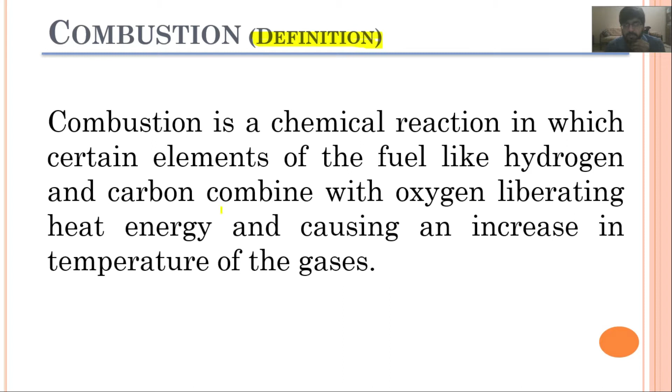Then we discussed the combustion reactions and their equations, how these equations are formed. As I explained earlier, if I have a fuel like methane and I combust it in the presence of air, as a result I will get a molecule of carbon dioxide and two molecules of water vapors, and in order to balance the chemical equation I will add 2 in the oxygen as well.

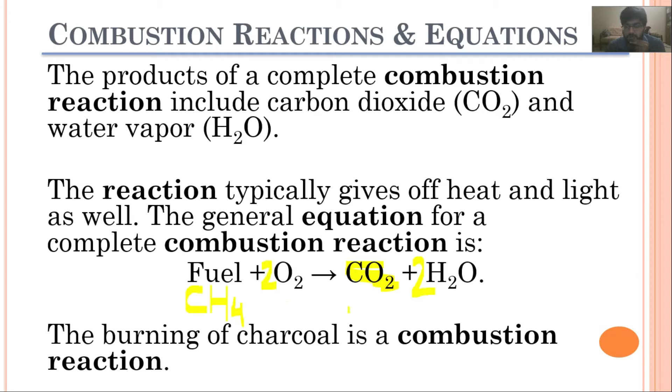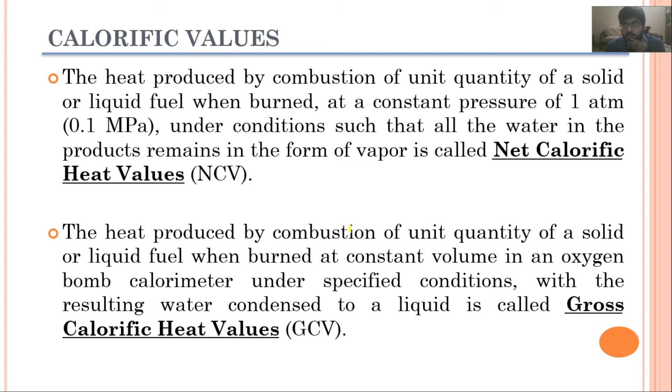Then we discussed the calorific values of a fuel, and I explained the difference between the net calorific value and the gross calorific value. Then we started

the topic of homogeneous mixtures, and I explained that homogeneous mixtures are desirable for SI engines, and the carburetor is the equipment which performs this process of preparing a homogeneous mixture for combustion.

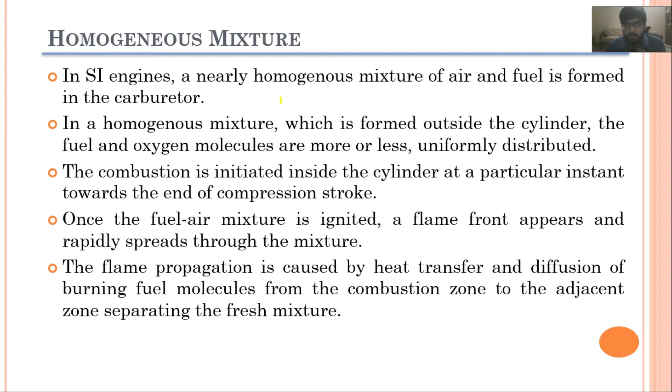Then we also discussed the factor of normal flame velocity, and that for the equivalence ratio of 1.1 to 1.2 we will get the maximum flame velocities. Then

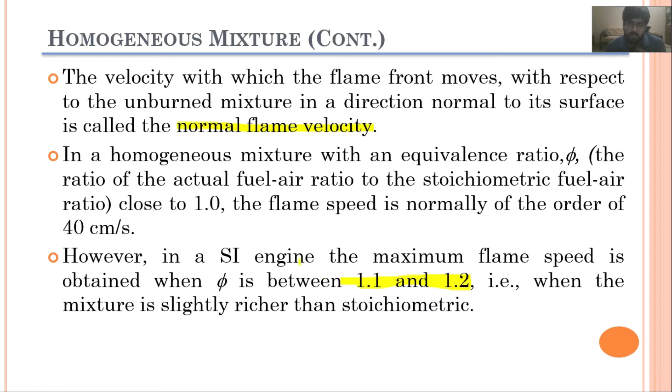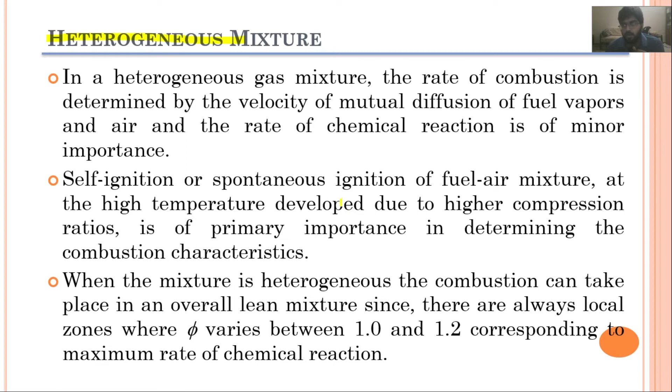we moved forward towards the topic of heterogeneous mixtures, and I explained that in CI engines we basically have a heterogeneous mixture because the fuel is being injected after the compression stroke. Because of the high temperature of this hot air, the fuel basically self-ignites after gaining energy from the hot molecules of the air.

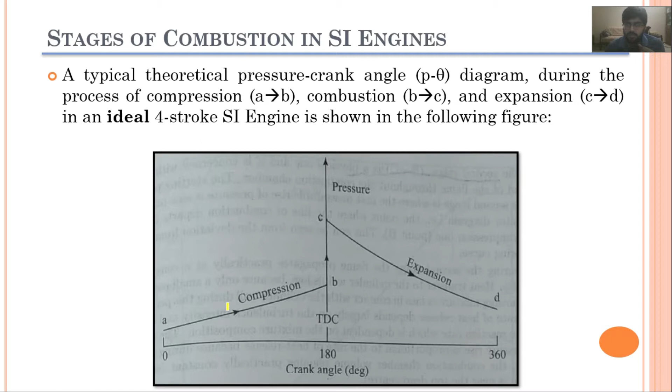Then we discussed the stages of combustion, and I explained that in SI engines we have basically three stages of combustion. First one is the ignition lag, second is the propagation of flame, and third one is the afterburning.

In this ignition lag, at the beginning of this first period, the spark ignites, which will combust the fuel present in the quiescent layer, and then these already burned particles of flue gas will move forward, and it will compress the air-fuel mixture present beyond them, and transfer the energy to them, and then they will combust.

So ignition lag is that duration from where the combustion has started, and we do not have that much significant rise in the pressure.

The second period starts when a sudden increment in the pressure occurs, and this second period is basically known as the propagation of flame. In this phase, the flame speed reaches its maximum velocity, and the entire air-fuel mixture in the combustion chamber will start to combust.

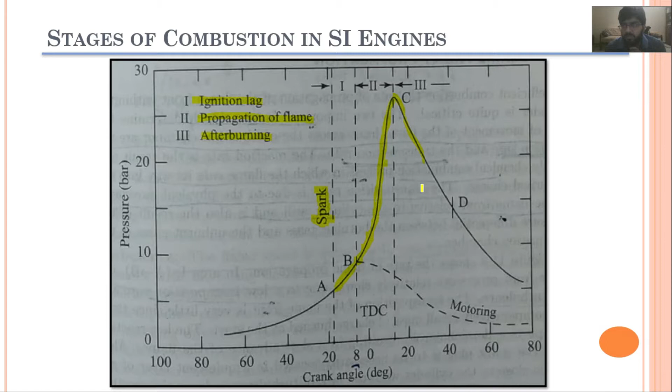After that, in the third phase of afterburning, most of the fuel particles have already been combusted. It is basically the power stroke, the exhaust stroke is after it. Now the piston is moving downward, the pressure will start to decrease, and if there are any fuel particles which have still not combusted yet, they will also combust in this phase.

Then we discussed the flame front propagation, and I explained that it depends upon two factors: the first one is the reaction rate, and the second one is the transportation rate.

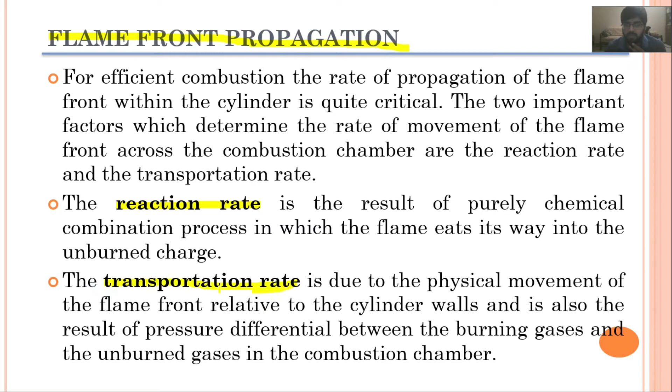Then I also explained this graph, that in the first region we have a low transportation rate, and similarly we have a low reaction rate in this region as well. Due to this low reaction rate, the advancement of the flame front is quite slow.

From B to C we have a rapid increment, a rapid propagation of the flame, because we have higher turbulence in this region, present because the flame has now gone beyond the quiescent layer, and in this region the reaction rate is quite high.

Similarly, in this region from C to D, the reaction rate is again quite low because we have only a few particles of the fuel left, and whenever it gets the oxygen to combust, it will combust.

So the reaction rates from C to D is also quite low.

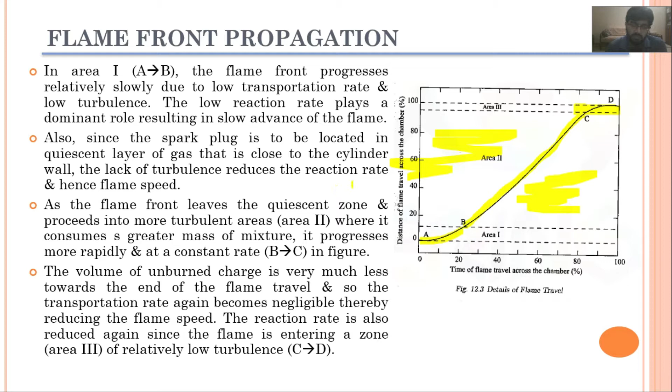Then we discuss the factors which basically influence the flame speed. I explained that with the increase in turbulency, the flame speed will also increase, and it will reduce the tendency towards knocking as well.

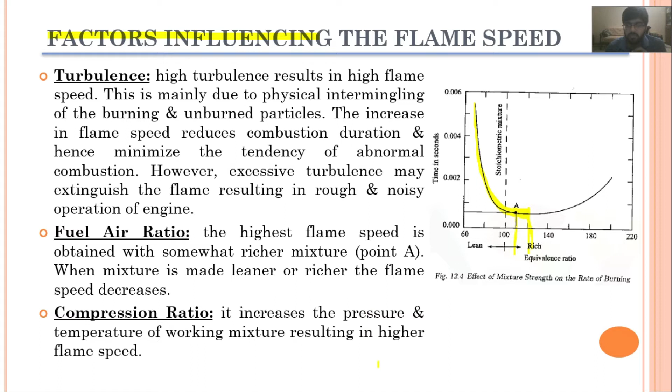Then I explained the second factor, the fuel-air ratio, with the graph showing that maximum flame speeds occur when the equivalence ratio is from 1.1 to 1.2. The third factor is the compression ratio. By increasing the compression ratio, pressure and temperature of the working mixture increases, which results in a higher flame speed.

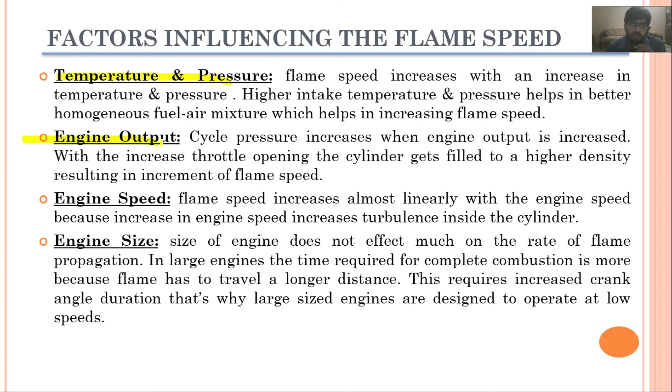The next factor was temperature and pressure. When we increase it, higher flame speeds are achieved. Then we discussed another factor: engine output, engine speed, and engine size.

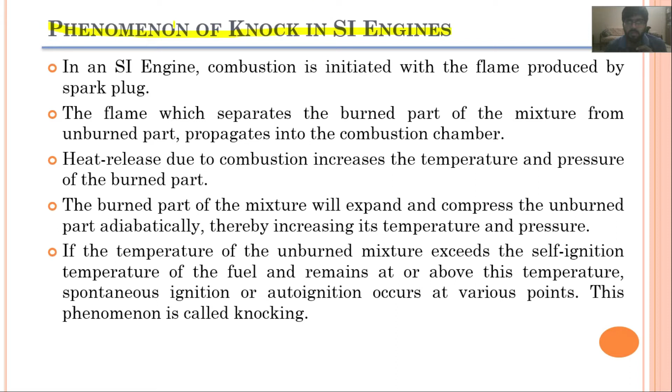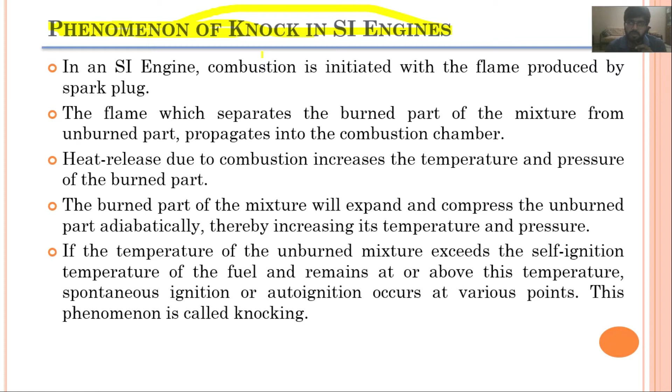Next, we discussed the phenomena of knocking in SI engines. I explained that in an SI engine, knocking basically occurs at the end of the combustion process, because if we divide the air-fuel mixture present inside the combustion chamber into layers, for example, this is the layer where combustion has started.

It will compress the next layer, and because of this compression, the temperature and pressure of the next layer rises. If that temperature increases beyond the self-ignition temperature, knocking will appear.

A secondary flame will be produced, which will propagate against the direction of the main flame, and because of this, knocking will be produced. So this is the phenomena of knocking in SI engines, and it usually occurs at the end of the combustion stroke.

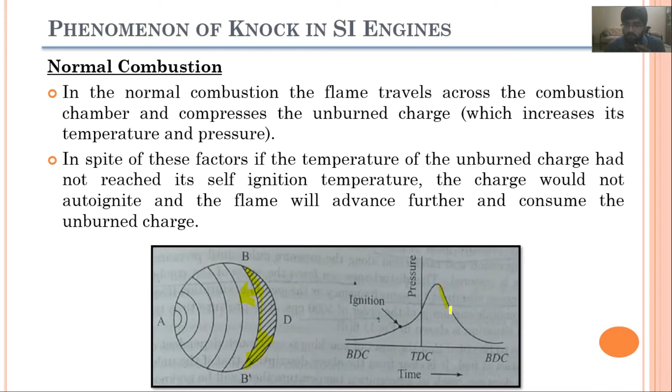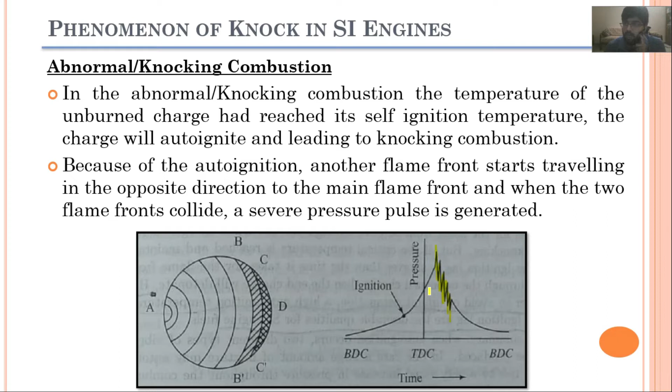So now today I am going to start off with the factors which basically affect the knocking. I didn't cover this topic in the last video because of the time duration limit, and the video duration had already gone beyond 75 minutes. So today I am going to start this topic.

The first factors are the density factors. So the first one is compression ratio. As I explained earlier, when you increase the compression ratio, what we are doing is basically increasing the operating pressure and temperature of the working fluid.

So when we increase the temperature and pressure, it will decrease the ignition lag, and when the ignition lag has been decreased in an SI engine, it will result in a greater tendency towards knocking. So we can conclude that if the compression ratio increases, the tendency towards knocking has also been increased.

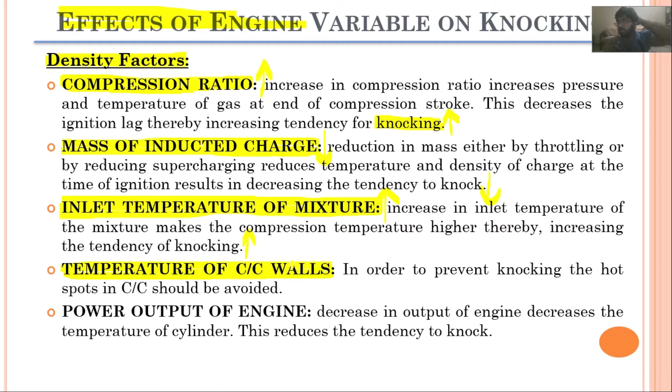Okay, the next factor is again temperature, but this time of the combustion chamber walls. If we have hot spots in the combustion chamber, or if the temperature of the combustion chamber is quite high, it will reduce the ignition lag duration and increase the probability of knocking as well.

So if we increase the inlet temperature, if we increase the temperature of the combustion chamber walls, knocking will also be increased.

So again, it has a direct relation as well. Next is the power output. As explained earlier, the power output of an engine is controlled by the pressure at which your engine is operating. So if we are reducing the power, it means the operating pressures of the engine have been reduced. Since the operating pressures are reduced, the operating temperatures will also be reduced, and it will result in a reduction in the tendency towards knocking. Your engine will have a lesser tendency towards knocking.

So we can conclude the density factors by saying that all the density factors like compression ratio, mass of inducted charge, inlet temperature of the mixture, temperature of combustion chamber walls, and power output of engine, they all have a direct relation with the knocking. If we increase these parameters, it will have a greater tendency to knock. If we reduce these parameters, it will have a lesser tendency to knock.

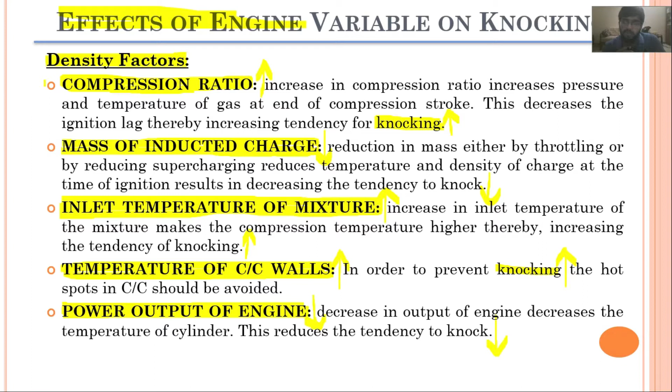Now moving forward, the next factor is the time factor. Starting off with the factor of turbulence, as explained earlier, when we increase the turbulence, the flame speeds are increased, and when the flame speeds are increased, the flame will travel throughout the combustion chamber very quickly, and as a result it will reduce the tendency towards knocking. So when we increase the turbulence in the combustion chamber, knocking will be reduced. So here we did not have a direct relation, we have an inverse relation.

So by increasing the turbulence, the knocking will be decreased. But we have to keep in mind that higher turbulence can also result in extinguishing the flame. So combustion chambers are usually designed keeping that in mind, that it should not extinguish the flame. The turbulence should be just enough that it only increases the flame speed and does not extinguish the flame.

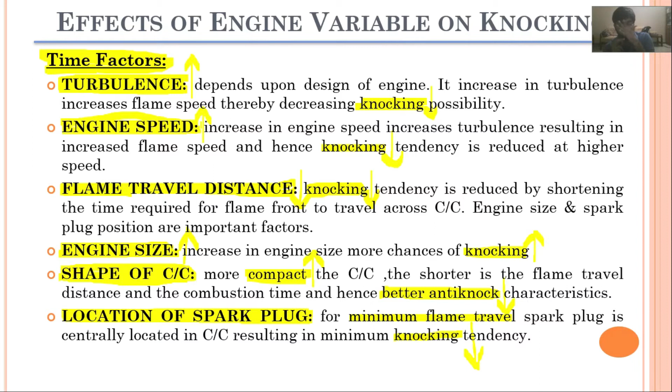Similarly, when talking about the shape of the combustion chamber, the more compact the combustion chamber, the better its anti-knocking characteristic. And if the spark plug is placed in a position where we do not have a minimum flame travel distance, we will have a greater tendency towards knocking, because the flame has to travel a larger distance, which can result in knocking.

Next factor is the composition factor, which is basically the fuel air ratio. As explained earlier, maximum flame speeds occur when the equivalence ratio is from 1.1 to 1.2. So maximum flame speed and flame temperature occur at an equivalence ratio of 1.1 to 1.2.

When this equivalence ratio is 1.1 to 1.2, we not only have higher flame temperature, but also a higher reaction rate. This means the flame will travel throughout the distance very quickly, since the reaction rates are quite high.

Here you can see the knock limited compression ratio versus relative fuel air ratio, which is the equivalence ratio curve for isooctane. For an equivalence ratio of about 1 to 1.2, you can see that for isooctane the compression ratio is about 7.

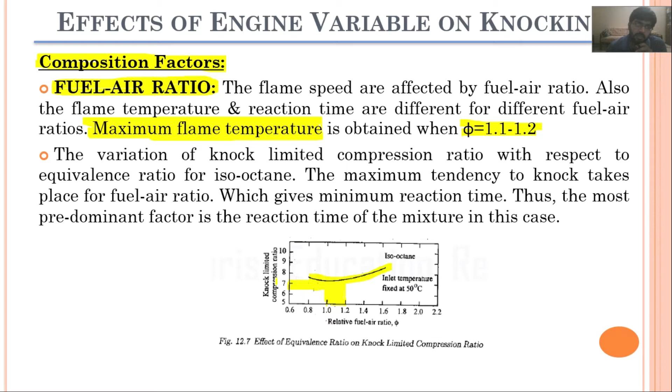This is just a summary of what I've explained in the past 15 to 20 minutes, and I expect you can study this table and relate it to the lecture I've tried to explain. I'll give you an idea of how to study it.

For example, if I am increasing the compression ratio, it will result in an increment in temperature and pressure. So the next question is what action should be taken. Since temperature and pressure are increasing, it results in a higher tendency towards knocking, so we have to reduce this increment in temperature and pressure by reducing the compression ratio.

So the question is, can we really change the compression ratio? Since the compression ratio is a designing factor, the operator cannot control it. Whereas if we talk about the mass of inducted charge entering the combustion chamber, it will also result in an increment in pressure, and since increment in pressure results in greater tendency towards knocking, we should reduce the mass of inducted charge.

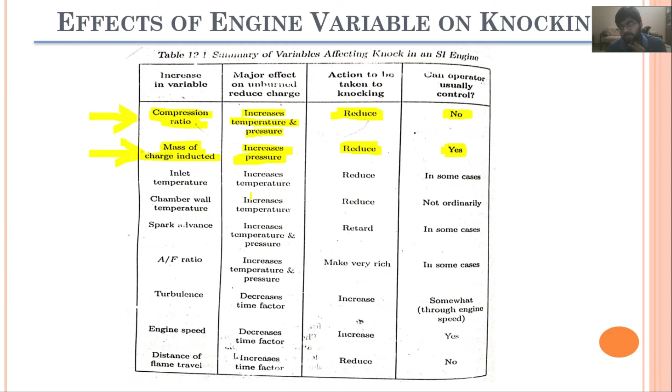Now I have another topic, and this topic is the combustion in CI engines. So far we have studied the combustion in SI engines, and not only that, we also studied the knocking phenomena. So today we are going to start off with the topic of combustion in CI engines.

As Dr. Usman has explained earlier, CI engines usually operate at a higher compression ratio, about 16 to 20. The question is why they operate at a higher compression ratio. The answer is that in CI engines we are only compressing the air, so we can compress it to higher compression ratios because air will not combust itself until fuel is injected into it.

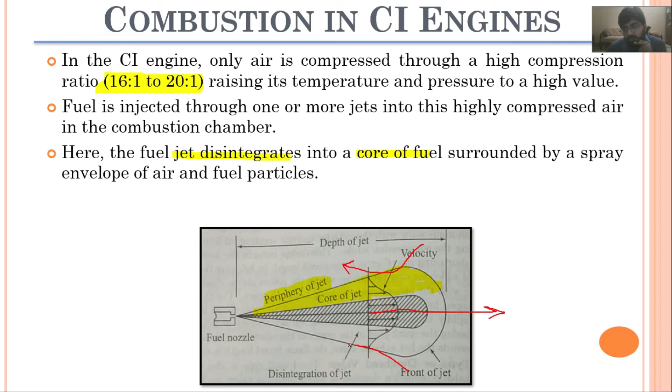This turbulence of the air particles - for example, an air particle coming in will take the fuel vapors along with it because of this turbulence. So therefore this periphery of the jet disintegrates.

As a result we get a mixture of air-fuel ratio, and this mixture is quite localized - it will be a heterogeneous mixture because it will not be constant throughout the combustion chamber. Since the temperatures inside the combustion chamber are quite higher than the self-ignition temperature of the fuel, the combustion will occur at localized points.

When combustion occurs at those regions, as a result of diffusion, the flue gas particles diffuse throughout the combustion chamber and transfer heat energy towards the surrounding fuel molecules. When they gain temperature higher than the self-ignition temperature, they also get combusted. So the fuel combusts initially at localized points, and then throughout the combustion chamber.

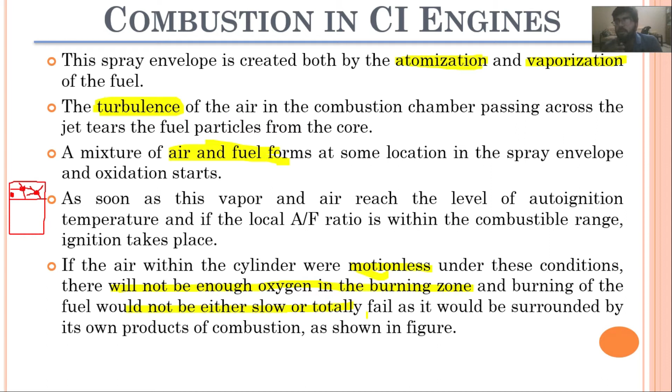But if we have air movement, a combustion chamber designed so that air is moving, blowing towards the jet of fuel, it will take away the fuel particles along with it, and they will get combusted, and fresh air will come, the new air particle will come, then it will take the further particles along with it and get combusted. So this is how the turbulence is of great importance.

It will help in propagating the flame throughout the combustion chamber. It will also result in increment in the reaction rates.

We have to keep in mind that this turbulence should be very controlled. If we have an uncontrolled turbulence, it will not increase the reaction rate, it will not increase the propagation of the flame throughout the combustion chamber, rather it will extinguish the flame.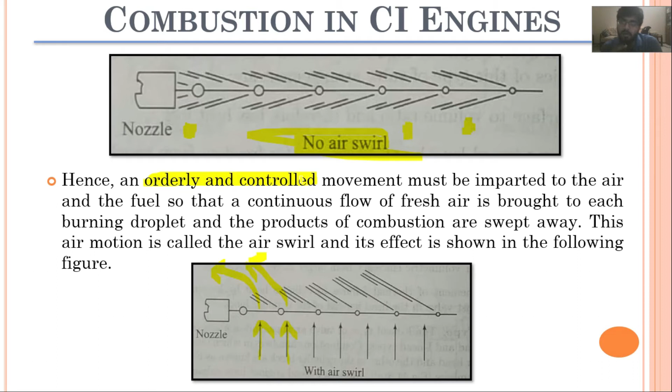Okay, next we have the topic of the stages of combustion in CI engine. CI engine consists of basically 4 stages.

First one is the ignition delay period. Second one is the rapid combustion period, which is also the uncontrolled combustion period. Third one is the controlled combustion period, whereas the fourth one is the period of after burning.

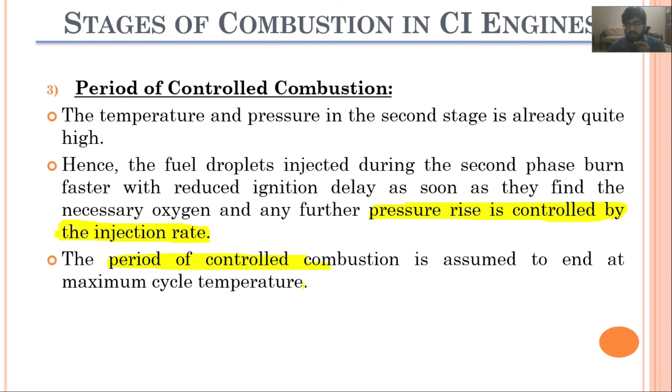So the period of controlled combustion is assumed to end at the maximum cycle temperature. This means that at the end of this stage we will have the maximum temperature of the cycle.

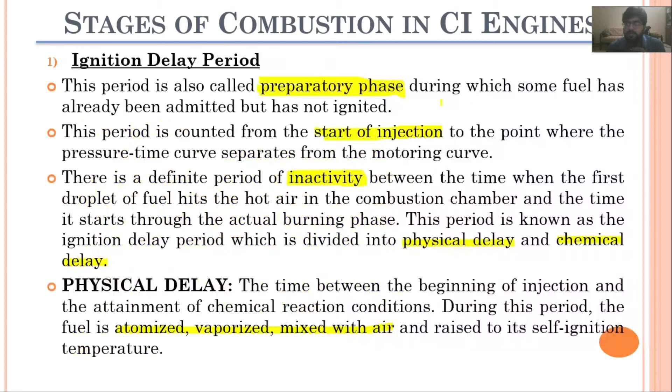Next and the last stage is the period of after burning, and the injection of fuel has also ended at the ending of the third stage. Therefore, the piston is now moving towards bottom dead center, and the pressure in the indicator diagram is also dropping. So in case there is any unburned fuel particle, it will get combusted, but no further injection of fuel will occur in this stage. The unburned or partially burned fuel particles may find some oxygen to combust and form the combustion products.

This process continues for a certain duration, and this is called after burning. The period starts from the point of maximum cycle temperature and continues over part of the expansion stroke. It may correspond to 70 to 80 degrees of crank travel from top dead center. From this point, let's say 10 degrees of crank travel up till this point, this is basically the region of after burning.

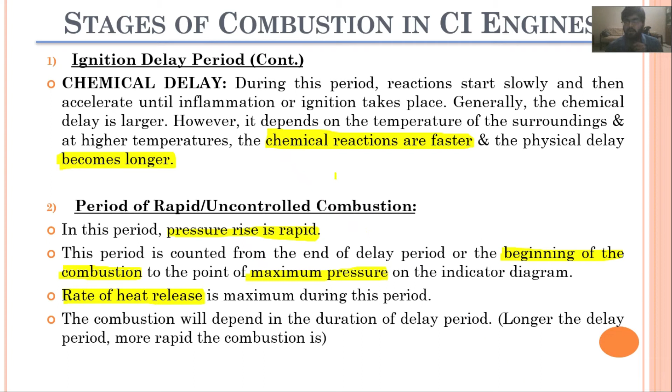So these are the 4 stages of the CI engines. I hope these stages are clear to you, and all of you must have understood the basic concepts of it.

Alright, now I'm going to start off with the topic of the factors which basically affect the delay period. As I mentioned earlier, this is the first stage of combustion in CI engines, and this delay period depends upon many factors, which we will discuss here.

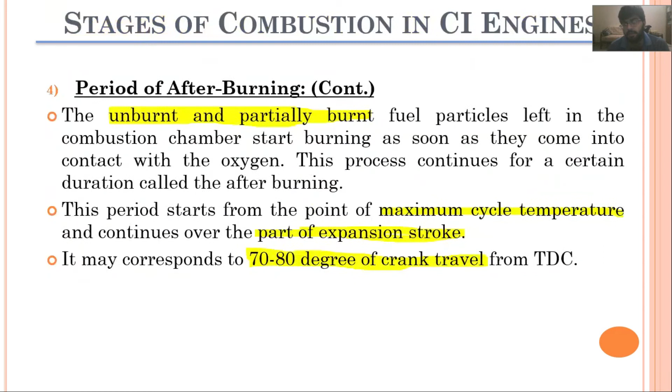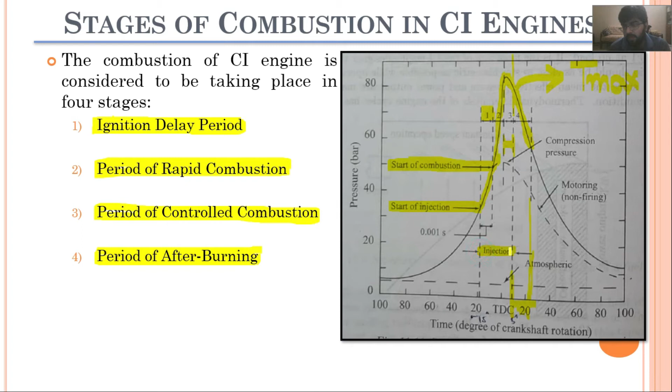During this delay period, the fuel injection has already started, but the combustion hasn't started yet, and the point from where injection of fuel started up to the point where combustion starts is basically the delay period. If I again show you the indicator diagram of pressure and crank travel, you can see that the first stage is from the start of injection towards the start of combustion, and the injection will end at the end of the third stage.

Now coming back, this delay period depends upon many factors, and the first and very important factor is the compression ratio. We can see that by increasing the compression ratio, the pressure and temperature inside the combustion chamber will be increased. Since these pressures and temperatures have been increased, it means the fuel will achieve the self-ignition temperature a bit earlier.

Therefore, when we increase this compression ratio, the delay period will be reduced. We will observe that reduction in the delay period because the higher temperatures have been achieved, and it will help the fuel to combust as soon as possible. Therefore, we will observe the reduction in the delay period.

Similarly, when we talk about the intake temperature of the air, since the temperature of the air has been increased, as soon as the fuel is injected into the combustion chamber and the temperatures are very high inside, the fuel will combust as soon as it gets in contact with this hot air, because the temperature is beyond the self-ignition temperature of the fuel. So again, when we increase the temperature of the incoming air, we will observe the reduction in the delay period.

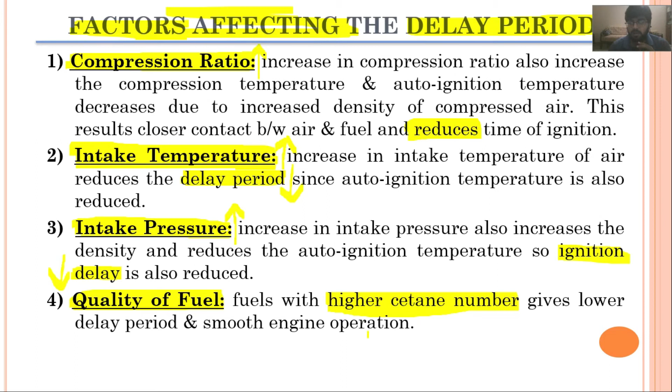Next is the engine speed. When we increase the engine speed, the engine is reciprocating in lesser time, taking smaller time while reciprocating since the speed has been increased. Therefore the delay period will also be reduced, because combustion would be occurring very rapidly. So if we increase the speed, the delay period will also reduce.

But when we are talking about crank angle, the delay period will be increased. But when we are talking about the time duration, meaning milliseconds, then the delay period will be reduced.

Next is the engine output. If we want to increase the engine output, we have to increase the operating pressure and temperature, and also increase the fuel air ratio. Increment in all of these factors will decrease the delay period. So increasing the engine output will decrease the delay period.

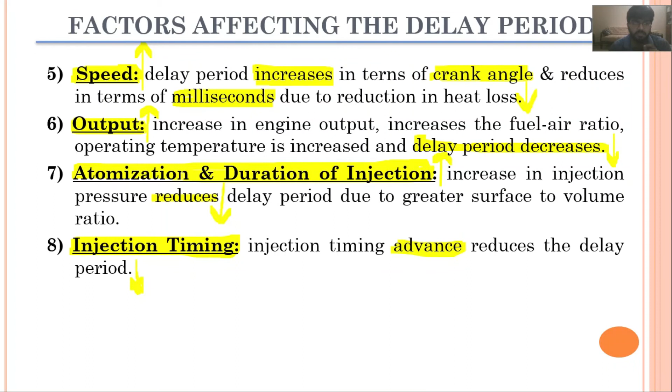So the next is injection pressure. As I mentioned earlier, injection pressure will increase atomization, and because of this increment in atomization, the fuel will take lesser time to self-ignite, resulting in a reduction in the delay period. So it reduces the physical delay due to the greater surface to volume ratio, or better atomization because of this higher injection pressure. This is how you guys will study this table.

I am going to discuss another factor, which is jacket water temperature. When we increase the jacket water temperature, we are basically increasing the temperature of the combustion chamber, which will ultimately cause a reduction in the delay period. The reason here is also mentioned, that there is an increment in the wall and air temperature. This is how you guys can study this table. I have already discussed these factors in quite some detail, and I hope you guys can study it by yourselves.

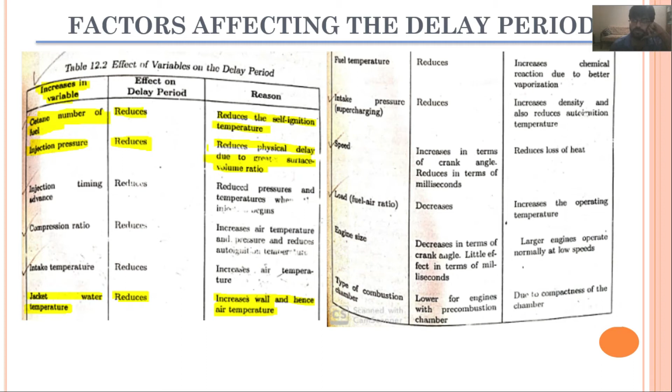Okay, next topic is the comparison of knocking in SI and CI engines. I have explained the knocking phenomena in SI engine in quite some detail. Now I am going to explain about the knocking in CI engines.

In CI engines, since self ignition occurs from the start of the combustion process, knocking will be occurring inside the CI engine. We can conclude that in CI engines there is always a knocking phenomena, but it should be controlled so we do not have a drastic effect on our IC engine. In SI engines the knocking basically occurs at the end of the combustion process. As mentioned earlier, the layers get compressed, and the last layer, or maybe the second last layer, will result in the knocking.

But in CI engines there is always knocking since the start of the combustion process. So we can say that in SI engine knocking occurs nearly at the end of combustion, but in CI engines knocking occurs near the beginning of the combustion process. This is the main difference between knocking in SI engines and CI engines.

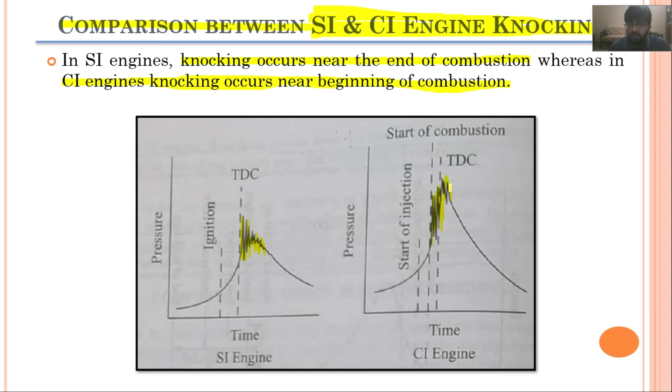Here you can see that these pressure pulses are occurring at the end of the combustion process, whereas in CI engines they are occurring at the starting of the combustion process.

In SI engine the charge that auto-ignites is homogeneous, but in CI we do not have a proper homogeneous mixture, since the fuel is being injected after the compression. Since in SI the charge is homogeneous, the intensity of the knocking is also quite higher.

Therefore the knocking in SI engines is also referred to as detonation. I have explained this point in the last video as well, that we have severe knocking in SI engines since the mixture is homogeneous, and therefore the knocking in SI engines is called detonation.

In CI engines only air is compressed during the compression stroke, and ignition can only take place when the fuel is being injected. Thus there can be no pre-ignition in CI engine.

In CI engine there is always an audible sound present, since we have self ignition occurring during the combustion. But when this audible sound becomes severe, it causes heavy vibrations in the engine. So we have to make sure that these severe vibrations do not occur in CI engines.

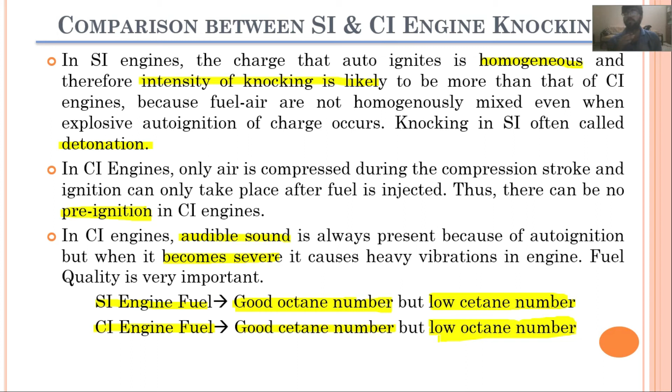If we are talking about a fuel which has a higher ignition lag, it means it has a good octane number, and we can use it in SI engines, but we cannot use it in CI engines since it has a higher ignition lag, and we want low ignition lag in CI engines.

So these are some of the characteristics which can reduce the knocking in SI engine and CI engine. I will discuss these factors. I have already explained these phenomena in quite some detail, but I will quickly go through this table.

For example, if we are talking about the ignition temperature of the fuel, in SI engine the ignition temperatures should be higher, but in CI engines the ignition temperatures should be lower.

When we are talking about the ignition delay, as I explained earlier, SI engines basically require a longer ignition delay, but in CI engines we require shorter ignition delay, so that lesser amount of fuel is accumulated in the combustion chamber, and we do not have that much uncontrolled combustion during the second phase.

Next is the compression ratio. SI engines are restricted to low compression ratios. On the other hand, CI engines can operate at higher compression ratios because only air is being compressed in CI engines.

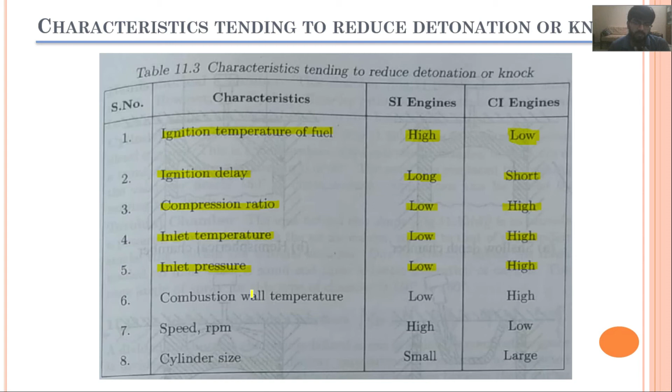Similarly, when we are talking about the combustion chamber walls temperature, it should be low in SI engines, otherwise self ignition will occur and knocking will occur. It can be high in CI engines because only air is being compressed.

When we are talking about the speed, it should be high in SI engines, and in CI engines speed should be low.

And when we are talking about cylinder size, SI engines will be operating at a smaller size, and CI engines would operate at larger cylinder sizes.

So this was all about the topic of knocking.

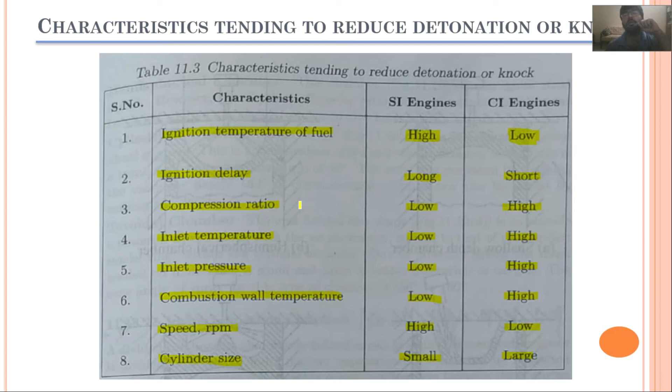Now I'm going to start off the topic of the combustion chambers. I will discuss these combustion chambers briefly, not in much detail, so it will not take that much time, and I will cover this topic in this video as well.

The spark plug is placed closer to the exhaust valve, in order to make sure that only flue gases go out through the exhaust valve, and not any fresh air-fuel mixture goes with it.

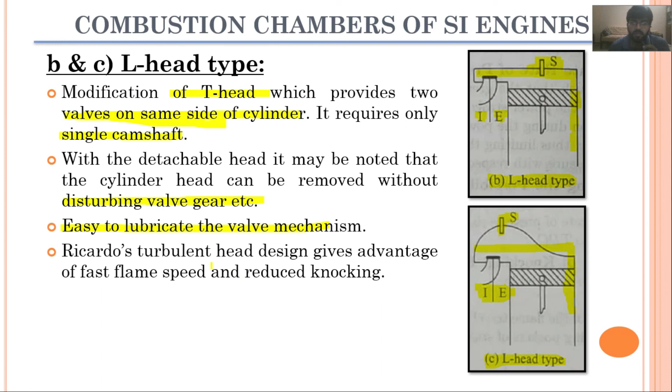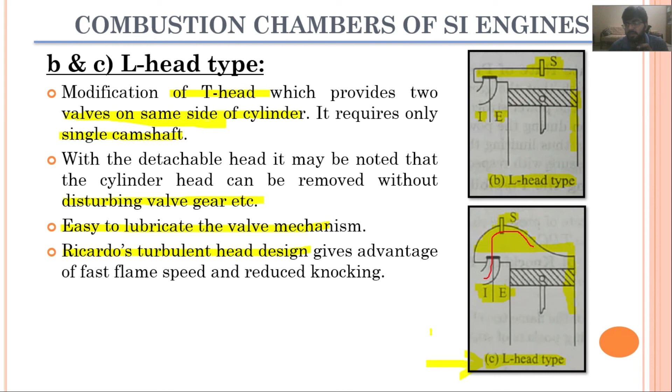They are very easy to lubricate, and the second one is basically Ricardo's turbulent head design. This arrangement has a shape that has basically increased the turbulence. So C has some advantage over the simple L type arrangement shown in figure B, and therefore we will have a reduction, and we will have higher flame speeds in this L head type shown in figure C.

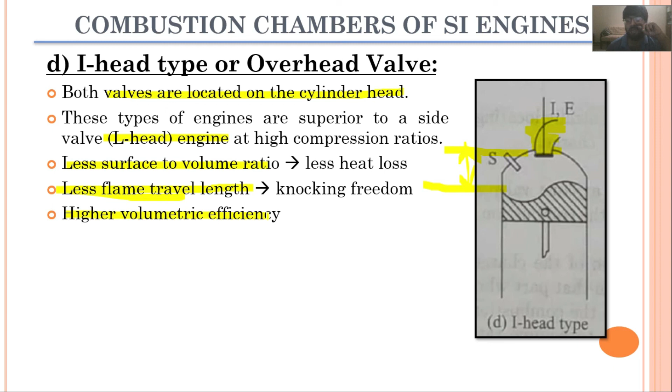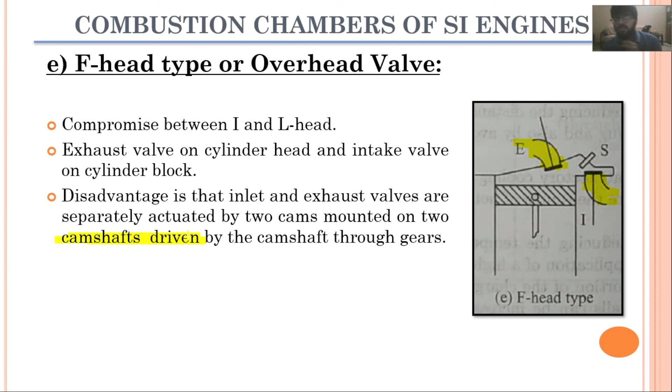Next is the F type, F head type, and here you can see it is basically a mixture, or a compromise, between I head and L head type. So exhaust valves are placed on the cylinder head, whereas intake valves are designed on the cylinder block. Since the exhaust valves and intake valves are placed separately, it will require two camshafts as well, and these camshafts would be driven by two separate camshaft gears. So this is the disadvantage of this F head type arrangement.

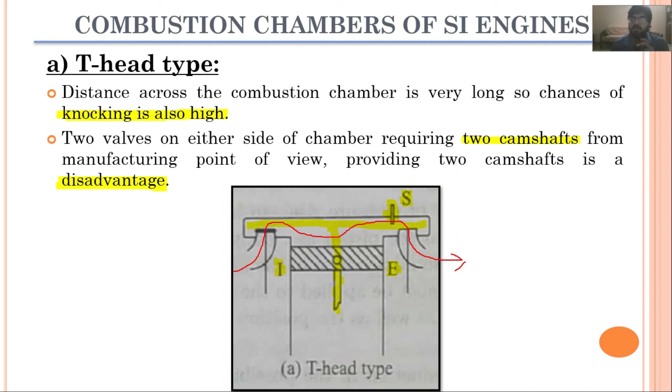So that was all about the five different arrangements, five different configurations of the combustion chambers in SI engine. Next we have the combustion chambers of CI engines.

Again, as I mentioned earlier, I will not discuss these combustion chambers in detail, I will just briefly go through them. Combustion chambers in CI engines can be classified into two categories. First is direct injection, and second is indirect injection. In direct injection, the fuel is injected directly into the combustion chamber and gets combusted there. Whereas in the indirect injection system, we have a pre-combustion chamber. The fuel gets combusted there, and then it is sent into the main combustion chamber.

Starting off with the direct injection combustion chamber, this type is also known as open combustion chamber. In these types, the entire volume of the combustion chamber is located in the main cylinder. So there is only one cylinder, the main cylinder, and fuel is injected directly into this volume. Some types of these direct combustion chambers are shallow depth chamber, hemispherical chamber, cylindrical chamber, and toroidal chamber. Again, you can study these topics in the book.

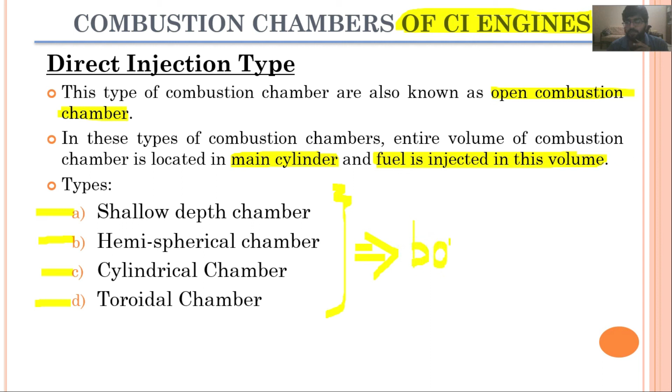So that's all regarding the topic of combustion and combustion chambers.